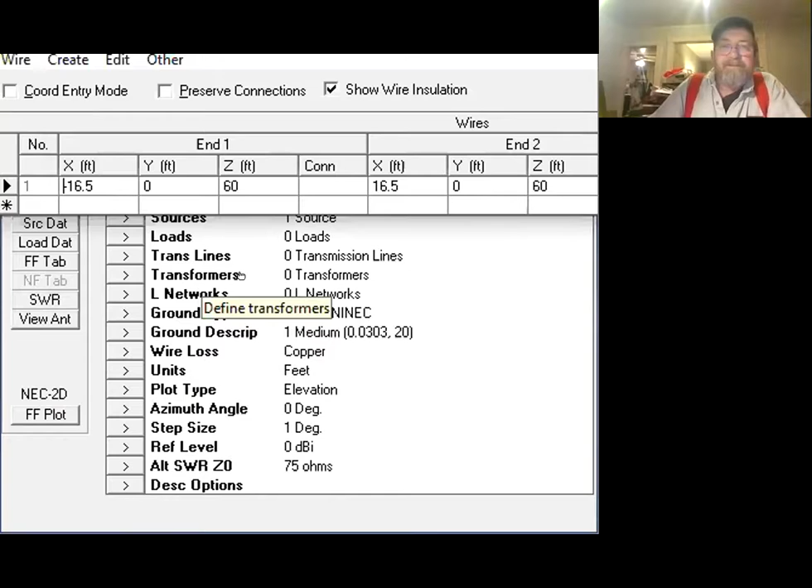You got X, Y, and Z, and each thing is one wire. So this is a wire that goes from, X is side to side, Y is front to back, and Z is height. And again, we set it to feet. So I like to start at the center being 0 and 0. So this wire goes from minus 16 and a half feet, and you can think of that as 16 and a half feet to the left, and it goes to plus 16 and a half feet. You can think of that as 16 and a half feet to the right.

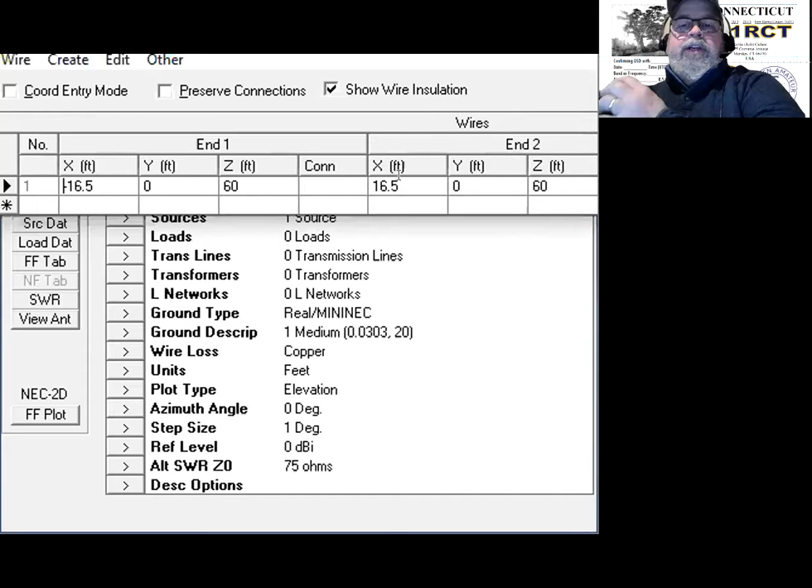Can I interject, John? Yes, go ahead. So if any of you are familiar with the EOC, we've got 3 telephone poles or utility poles. And you could think of minus 16 and plus 16 and 0. The 0 is the middle telephone pole, and minus 16 would be the northern pole, and the plus 16 would be the southern pole, or some sort of representation like that. Yeah, that's okay, because we're going to feed this in the middle.

Okay, and I have it set at 60 feet high. I'm going to use number 14 wire right here. Okay, and I set it for 111 segments. The segments are, up to a point, the more segments you have, the more accurate your antenna model is going to be. It's going to slow down. More segments will slow down calculations.

Back in the bad old days with slow computers, that used to be more of an issue where it would take forever to calculate this antenna with 111 segments maybe, and there was a limit to segments on some of the free software. Dielectric constant, don't worry about that.

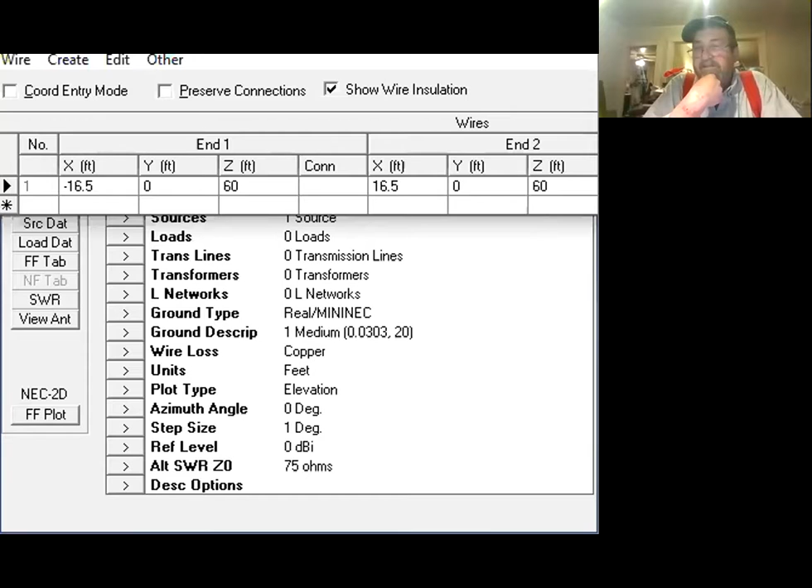What exactly, John, is a segment? Segment is, you're taking that, we've got 33 feet of wire. Okay. And we're chopping it up into 111 segments. Uh-huh. Okay, and what the software is going to do is analyze the antenna currents in each one of those segments sequentially, and then put them together to make the pattern of the radiation. So the more finely segmented it is, the more accurate your pattern is going to be.

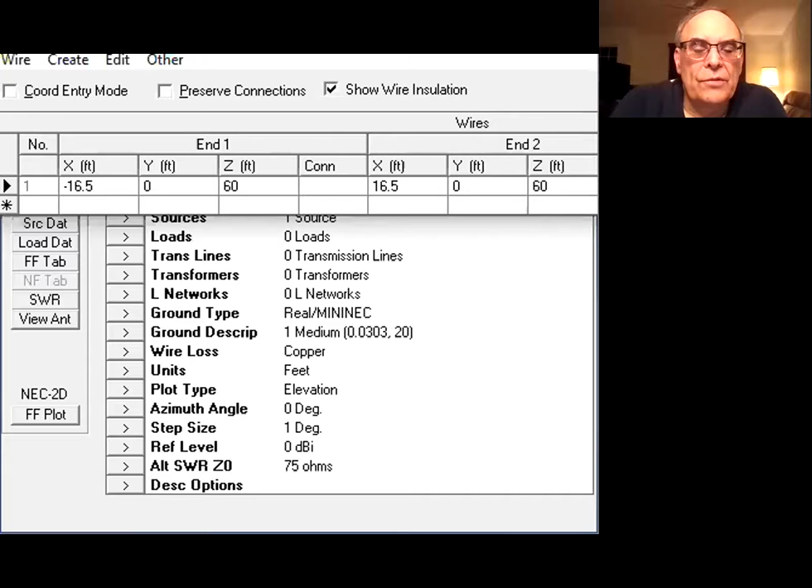Does that make sense? Yeah, I was just wondering, is there some calculation you use to come up with the 111, or is it just a convenient number you picked? You want an odd number, and I'm going to show you why in just a second. John, are you talking about, like, say you're making a dipole with 2 segments?

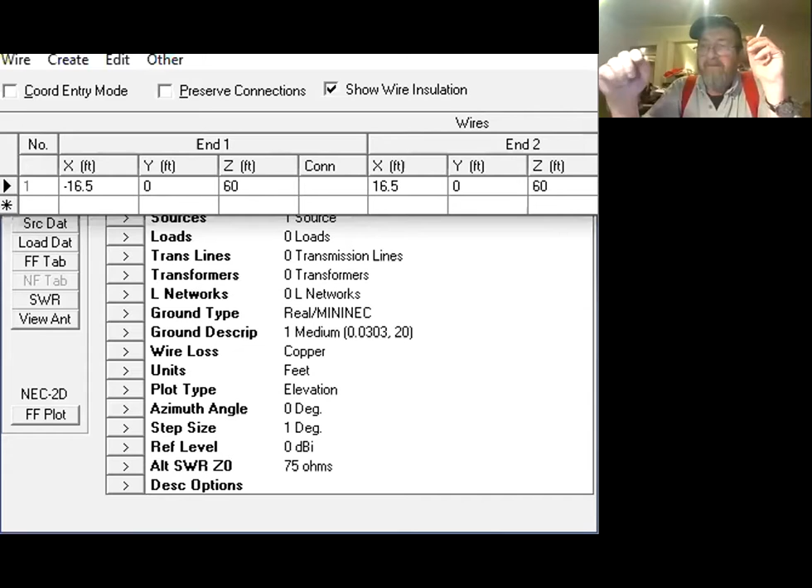Yeah, the wires have to be in straight lines. So if you want to do an inverted V, you need 2 separate wires. Right. Yeah. Okay. The wires have to be in a straight line, each different wire. You can't do a circle.

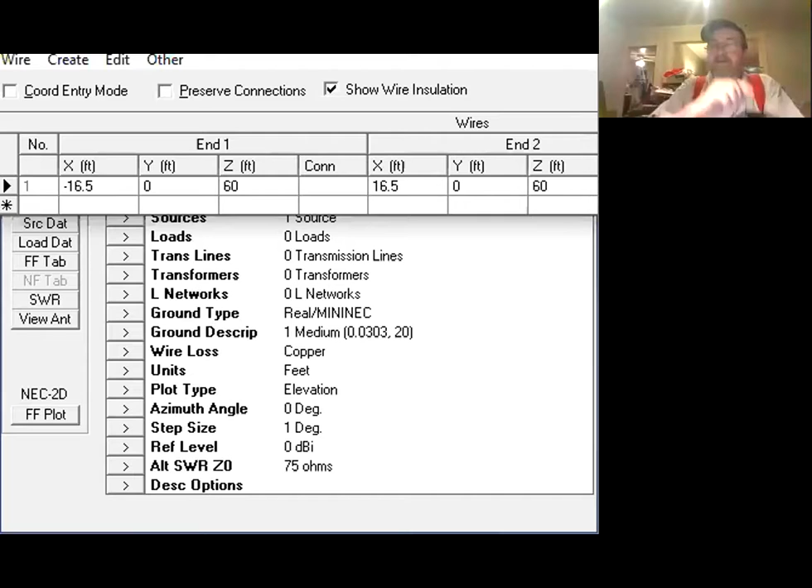To approximate a circular loop, for example, you'd have to do a bunch of segments: start with a triangle, and then a square, and then a pentagon, and then a hexagon, and then an octagon, a nonagon, a decagon, until you are approximating a circle as best you can to do an actual circular antenna. Okay, that doesn't mean circular polarization. That just means circular antenna. So each one of those wires, and you can have many, many wires in a model.

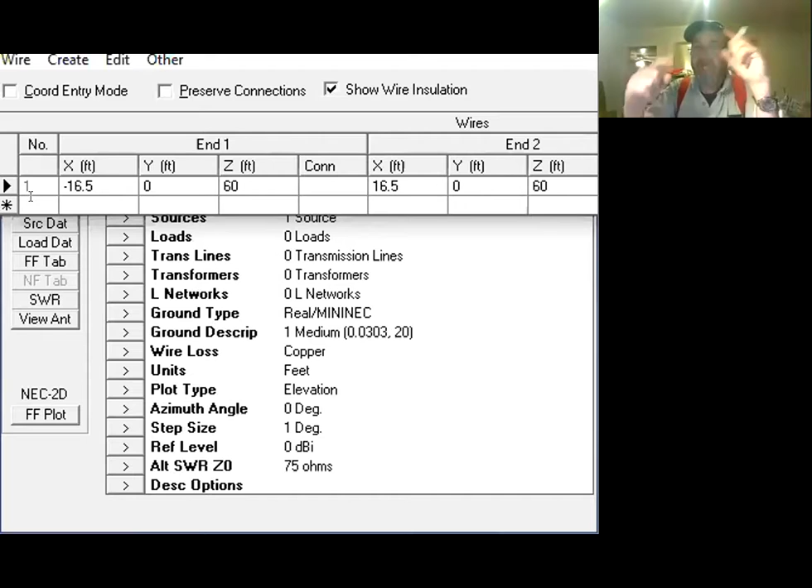Okay, a simple inverted V would have 2 wires, and they would each start at 0. They would go out a certain distance, and a lot of times you've got to start working with our old friends trigonometry and the Pythagorean theorem to figure out where they're going to end up as far as the X and then the Z for the height.

But you can see if you did it right, because there's a way to look at the antenna.

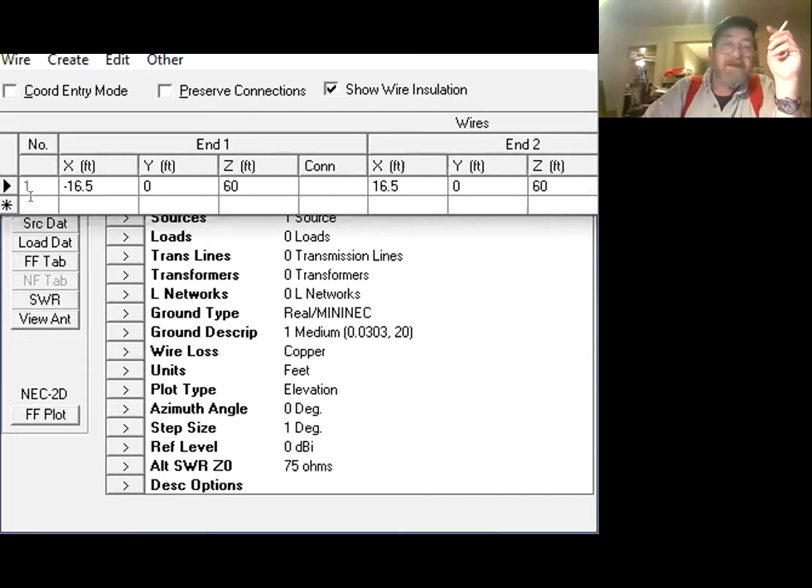So I bet your Algebra 2 trig teacher loved you. I bet he didn't, but he was a great teacher, by the way, one of my favorite teachers. Yeah, I enjoyed his class a lot.

But yeah, it can get into a little bit of math, but it's mostly simple, mostly Pythagorean - A squared plus B squared equals C squared gets you 99% of the answers. So anyway, that's where we're at with that.

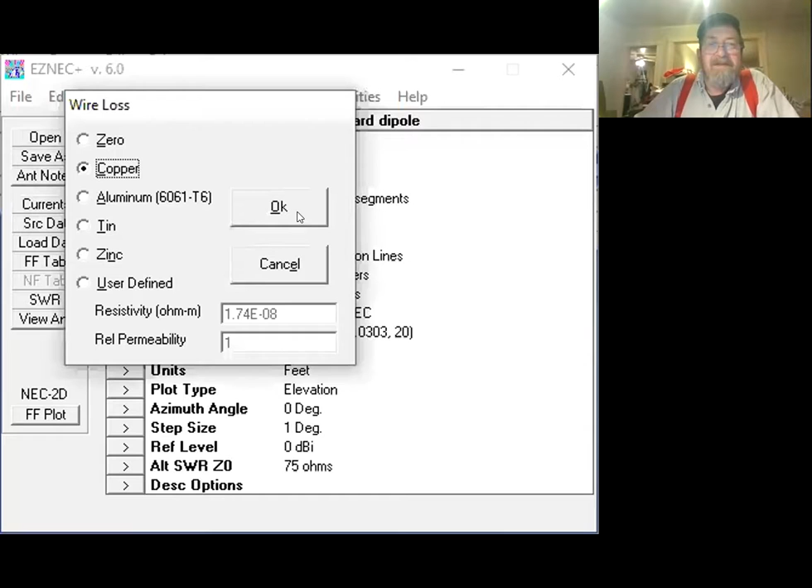Let's see, okay John, so we're back. The way I think of this when you're talking about segments is that in order to describe the antenna, which is not linear, what they're doing is using multiple segments to approximate the curve, because you can do linear regressions and equations for curves, and you basically approximate the curve with multiple short segments of straight lines. That's exactly what it's doing - approximating a curve, and you can play with it. Take it from 111 segments and look at your radiation pattern, take that down to 1 segment and see what the radiation pattern looks like, take it up to 311 and see what it looks like.

It's one of the great things, you can play with this thing all day long. So anyway, we got wires, okay, so we're kind of clear on that.

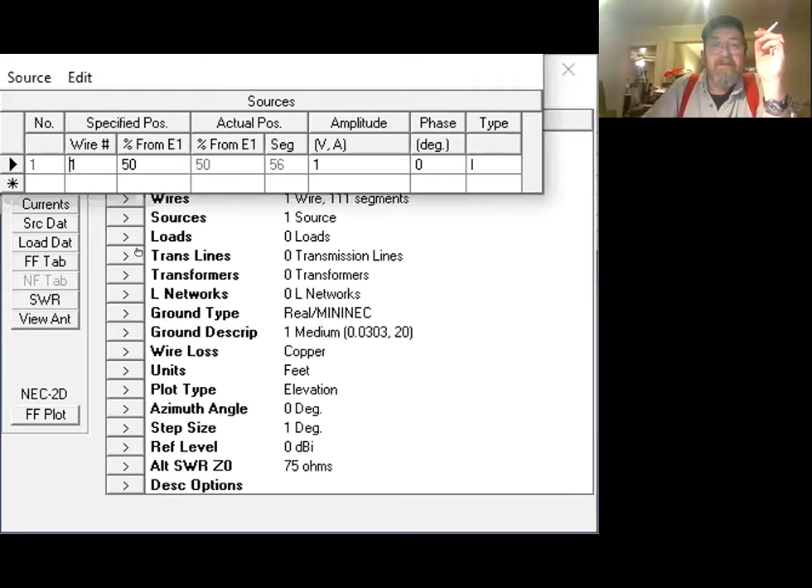And then, whoops, okay, sources - this is where we're going to feed it. Here's why you pick an odd number on a dipole like this: because we're going to be 50% from E1. Each wire has 2 ends, obviously, and this is from E1. We're going to feed it in the middle, so we want to be 50%, and that comes out right in the middle of an odd numbered segment.

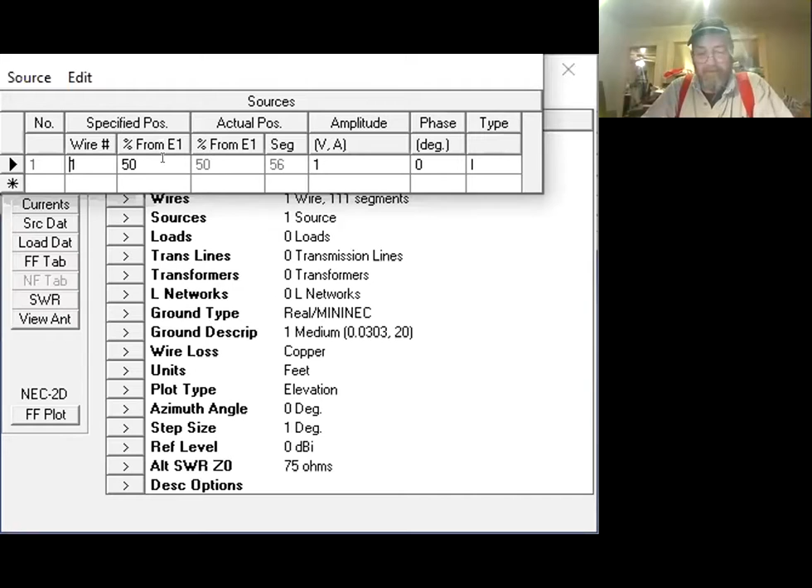So give me one quick second, I'll call you back, okay. Sorry, my favorite son - that was your math teacher. So, yeah.

Okay, so we're going to feed it 50% or halfway, going to feed it in the middle. Okay, that's going to be our source.

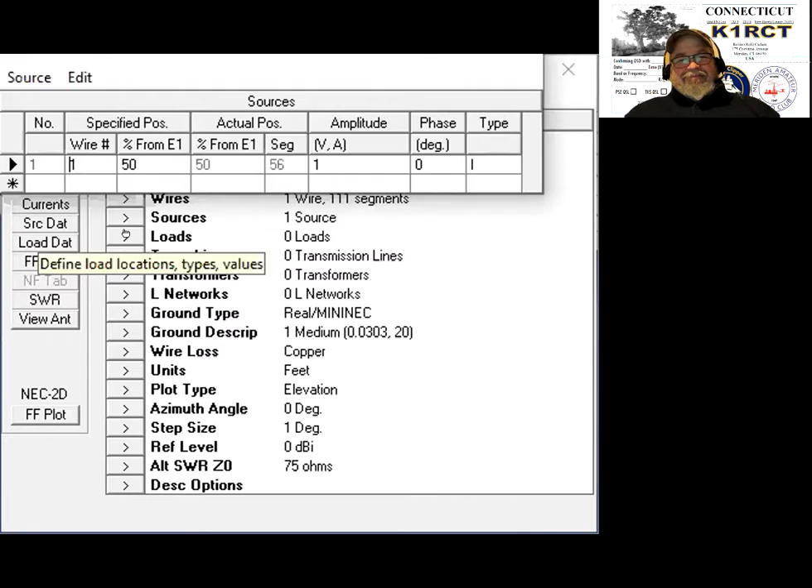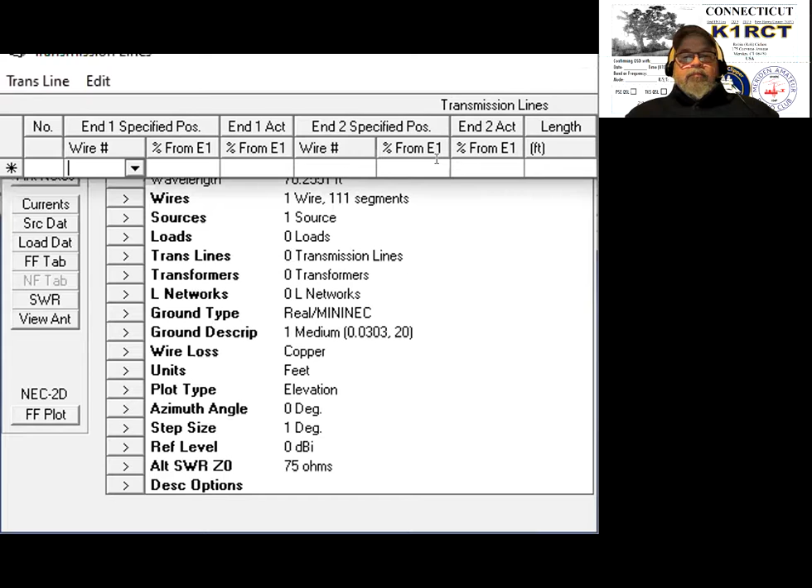Loads - loading coils would be a very good example of a load that you would put in. You can model transmission lines, add transmission lines, whether it's going to be 50 ohm coax or 450 ohm ladder line. You can put in transmission lines if you want, transformers and L networks, and you can really start getting pretty deep into it, but this will give us the basics of what we want.

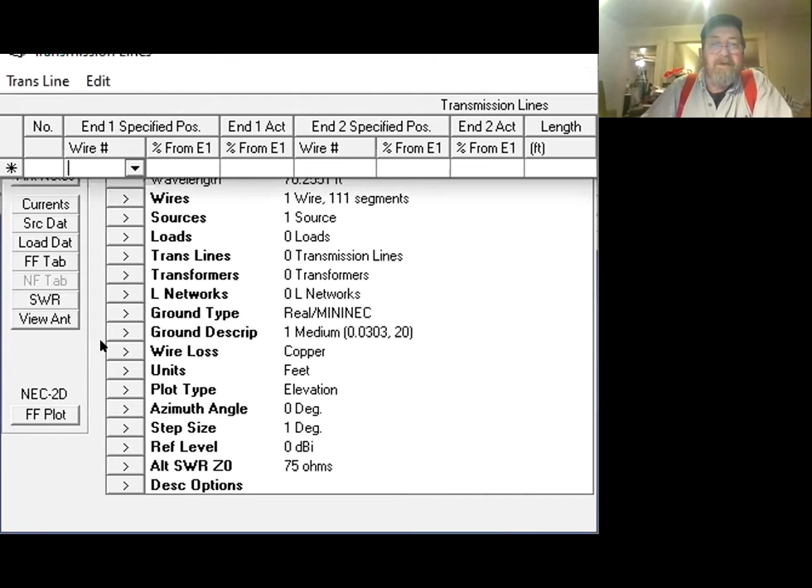Now we're going to go to view antenna here, and everybody can see that. I can't see the entire thing though, it's off the screen, let's see. Maximize if you do - okay yeah, there you go, that's a little better.

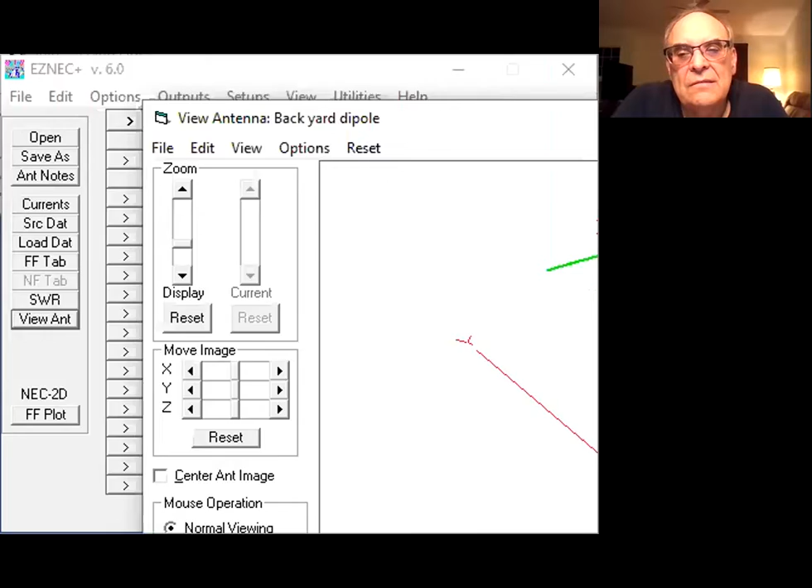Drag it down to the middle of your screen, John. Yeah, it's off to the upper right. No, it's still off to the right. That's a little better, there you go, perfect. Oh, was perfect, yeah, there you go, better?

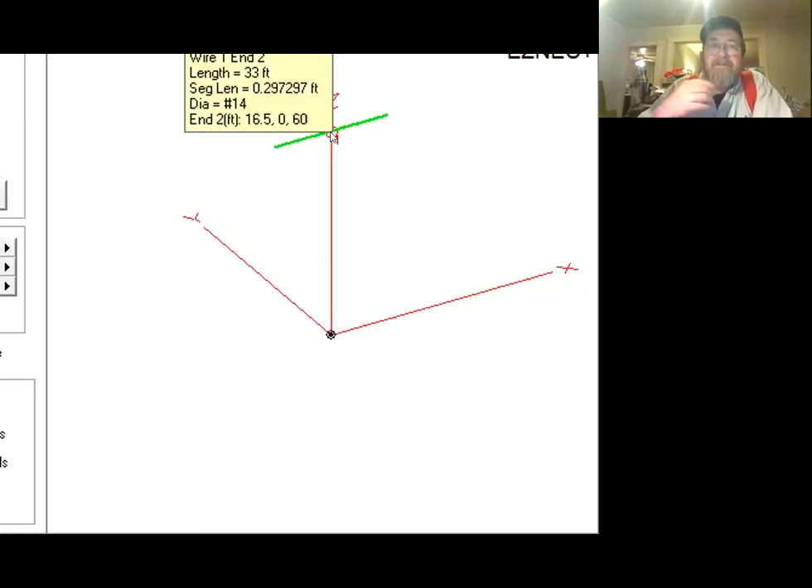Okay, yeah, okay, so here's our Y and our X and our Z, and there's our antenna. You can see right in the middle there is the circle, and that's the feed. You can see that I put the cursor right over it - you see that little pop-up box? It says the wire is 33 feet long.

33 feet long. The segment length is length divided by number of segments, 14 gauge wire, and end one is minus 16 and a half feet.

Move your cursor, there you go, there we go, and that's plus - yeah, it's plus 16 and a half feet. So that's what the antenna looks like, and that's just a good check too - is this what I meant to design? Okay.

So let's get rid of that, and then we'll take a look at the SWR. We specified again the frequency at 14 megahertz.

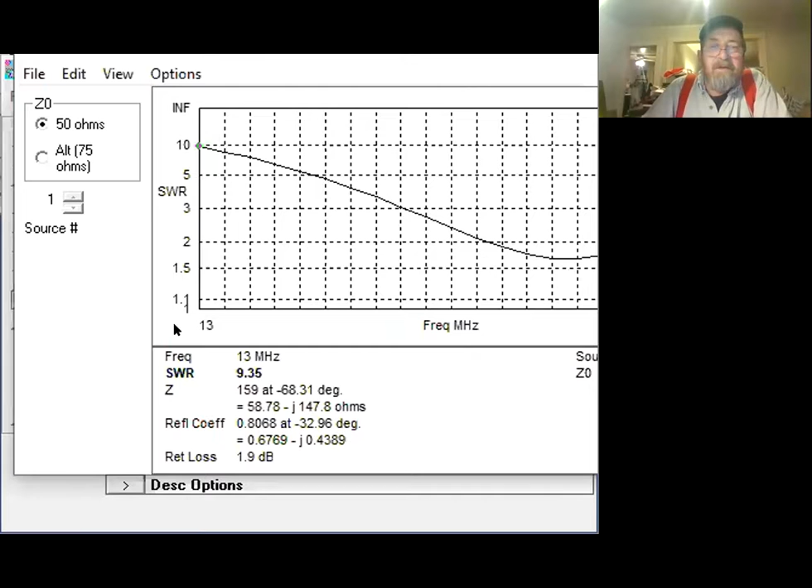1.1, 1.5 up to 10, and so right there is your low point, about 1.6 or so. 1.6, and that's right about what you would expect for, what do we say, the height was about 60 feet. That's right about almost exactly what you would expect for a 20-meter dipole at 60 feet.

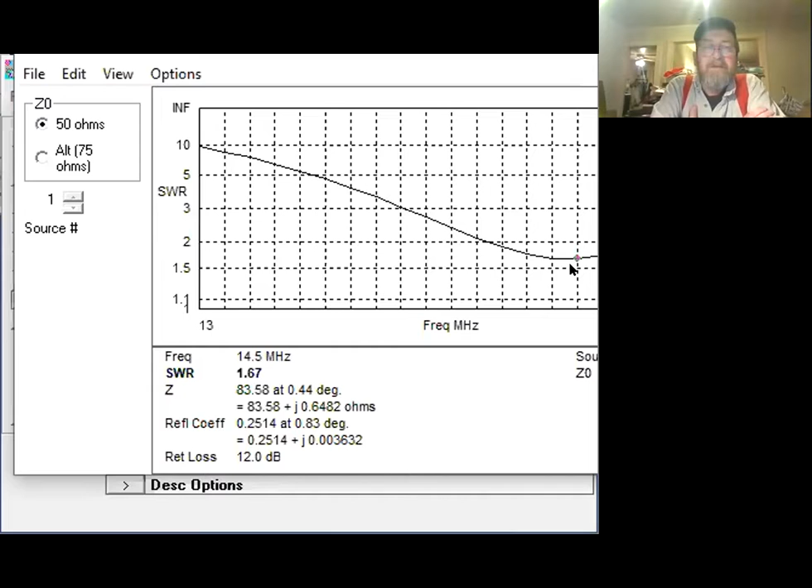What's your distance from ground? Yeah, what's the height above ground? I think he said 60 feet, didn't he? He said it, but I'm not sure if that's where it's set. I would check that, let's see.

Ah, crap. What do we do? Did I close the program? What an idiot, you closed the program, didn't you? Oh, what an idiot, your teacher's going to call you. At the very least, you stop here. All right, we'll start it up again.

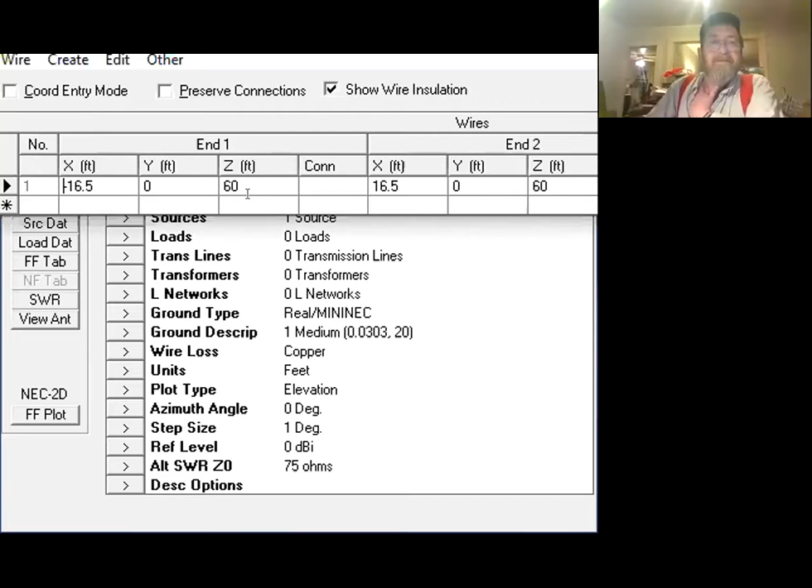No, I've had... so when I see the radiation going straight up, it's like the wires on the ground, like an NVIS. That's exactly what I thought. It looks like an NVIS, right? Yeah, here we go, 60 feet. Yep. Okay, he got a 60 foot.

Why would it look like that? I don't know, I'm just winging this, so I didn't really have it prepared.

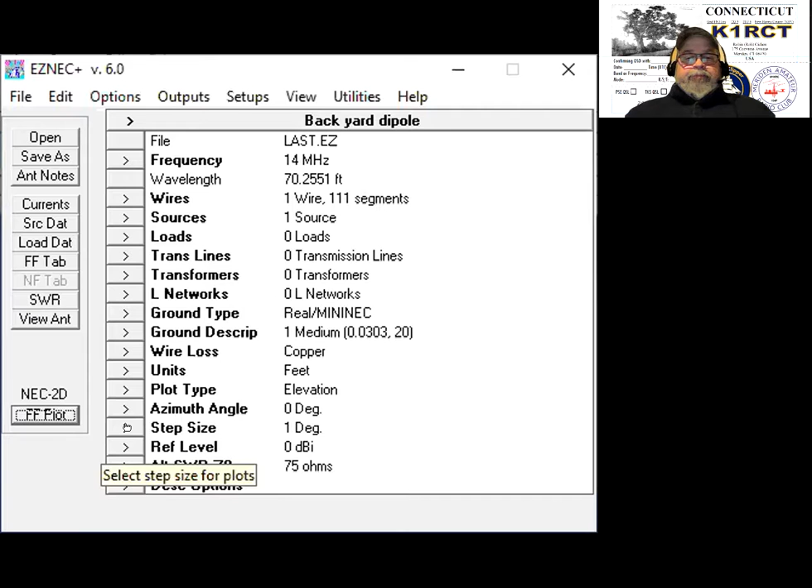Let's see, azimuth angle is 0. Oh, never mind, go back to... step size is 1 degree. Switch, change to azimuth. Okay.

But here's your, at 5 degrees, this is what you're in. One might say that an antenna that you just modeled, John, would be good for American, local, regional type transmission, right? I mean, literally, if you've got that type of azimuth or elevation angle, you're probably going to drop down. Your first hop's going to be somewhere in the U.S., maybe even your second hop.

Yeah, there's something I'm missing here, because that's not... that just doesn't pass the smell test for how a dipole, it's a half-wave dipole, works. That's not how a half-wave dipole should behave. I mean, we can try, well, let's see. Yeah, even 20 feet off, 10 feet off the ground is going to give you some normal propagation. Right, it's going to give you takeoff. We're going to cut that.

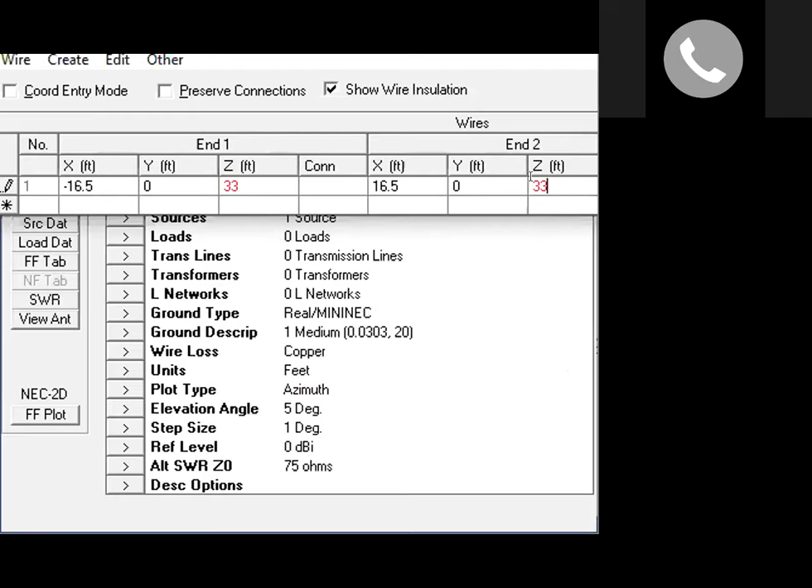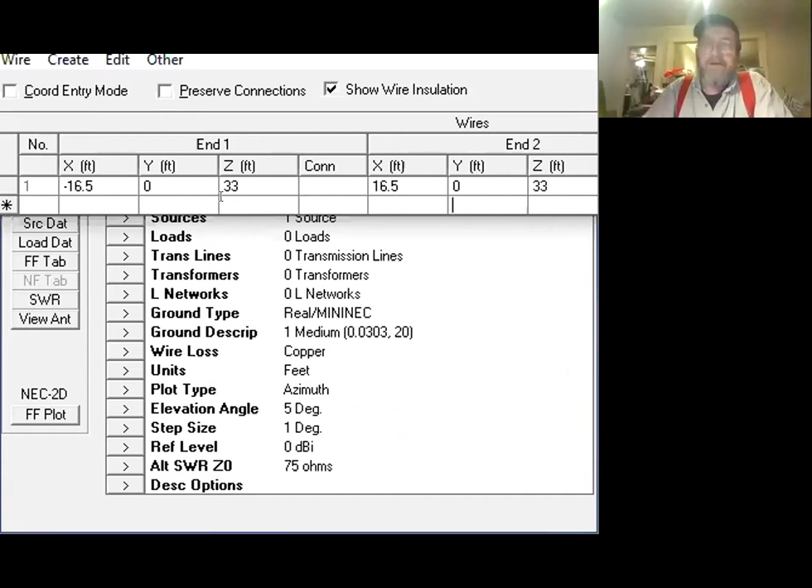To 33 feet, okay. Actually there are ways, if you have a lot of wires, there's a way to bring everything up and down by a certain amount altogether. You don't have to go into each wire, but it was just as easy to do that. If you're going to model a sloper or whatever, you can change those values.

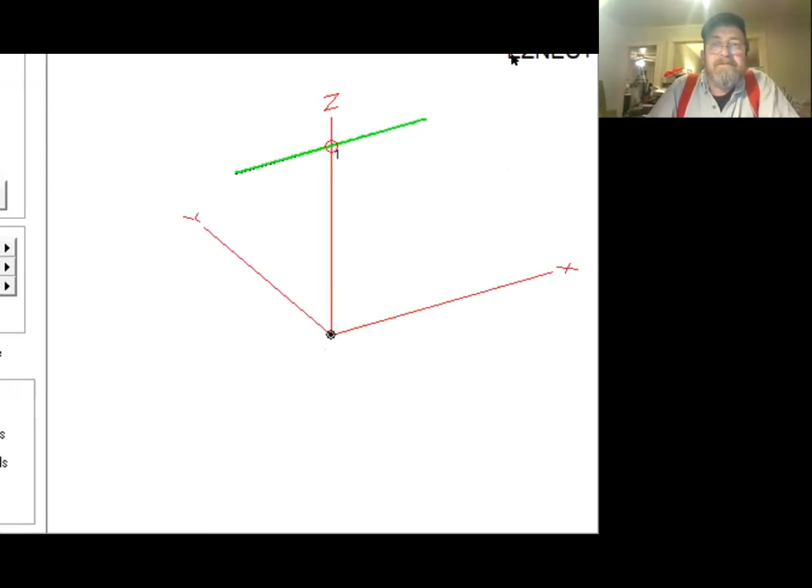Okay, so let's see. Antenna, okay, so the height now is about a half wave high. Okay, and we're going to... okay, and that's, see, I mean, that looks about the same.

Okay, and let's see, now we're gonna do elevation.

How's your arm, Eric? That's the one you were trying to find, isn't it? Yeah, it was fine until last night. This morning I woke up and put my arm up and it's like, it's not debilitating, but it's like somebody gave me a good punch in the arm. That's what it feels like. But otherwise, I get allergy shots every few weeks, so I'm used to sore arms anyway. I've been doing that since I was a kid. Well, I'm a diabetic, so I take shots every day, sometimes two or three times a day. Needles are old hat, right? They're old hat, but they don't make me sore afterwards. Sorry, okay, John, we hijacked your conversation.

No problem. Okay, this is the picture you're looking for. That's the one, buddy. Yeah, okay, so here's...

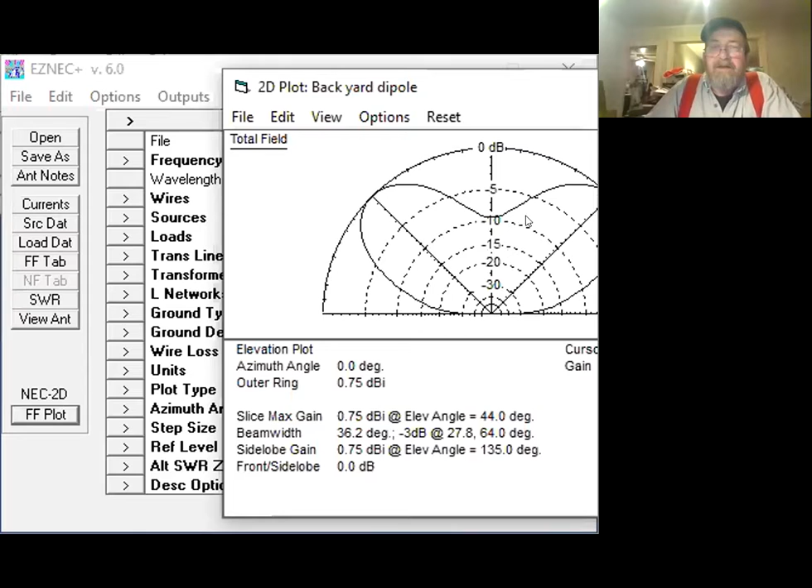So here we drop the height and you can see now it's starting to radiate better. And you can, if you watch the numbers, you see how they're changing with the elevation. So it'll default up to the max, that's what those lines are, and it'll bring them around to whatever elevation that you want.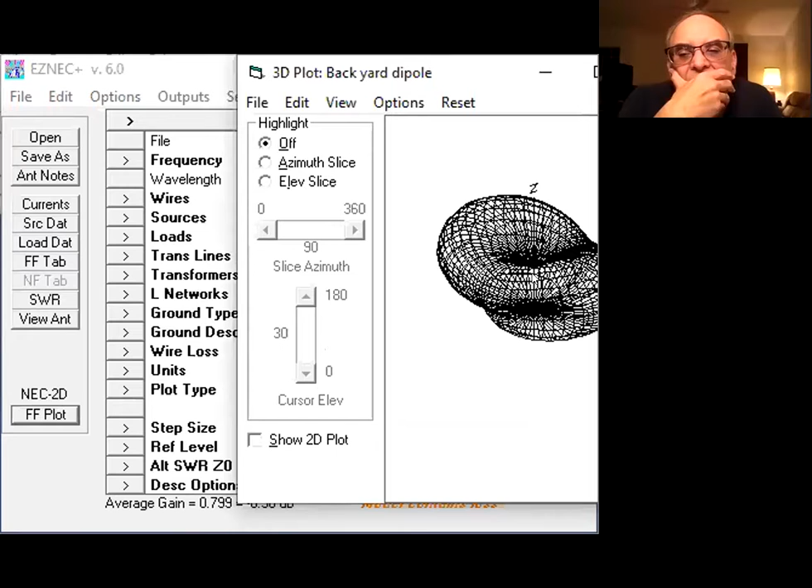Yeah, that's the 3D elevation and azimuth combined, and then you can slice it like that. Can you slide that a little to your left? Like grab it, yeah, right there, just grab it and move it. There you go.

Too big, is that too big? Go back one. Yeah, there, that's perfect. Dude, yeah, like that, fine.

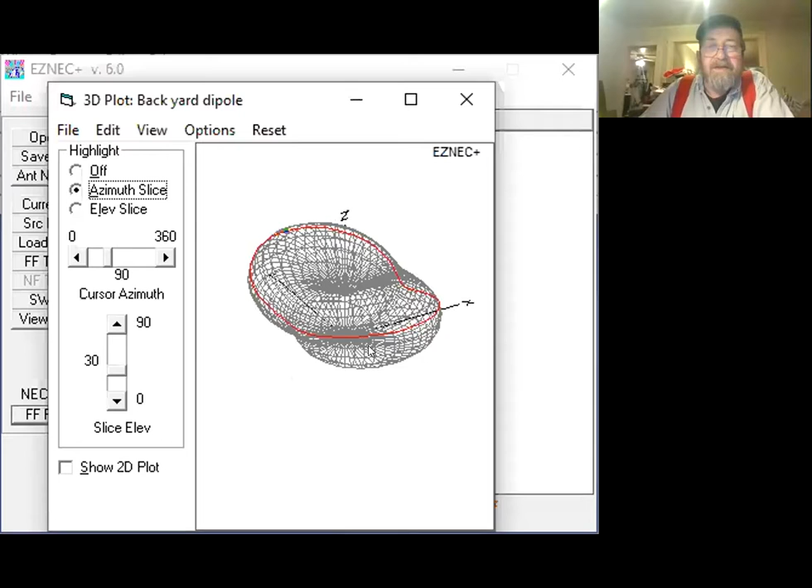Okay, so there's the red line there is your azimuth slice, and here's your azimuth, and here's your elevation slice. It's just a different way of looking at it. That paints a complete picture for my mind. I understand that, yeah, that's pretty cool.

Again, that gets you back to like that. If you show 2D plot, and you can slide them, I mean, you can play with this thing a million different ways, but so that's the very basics of how to build an antenna model.

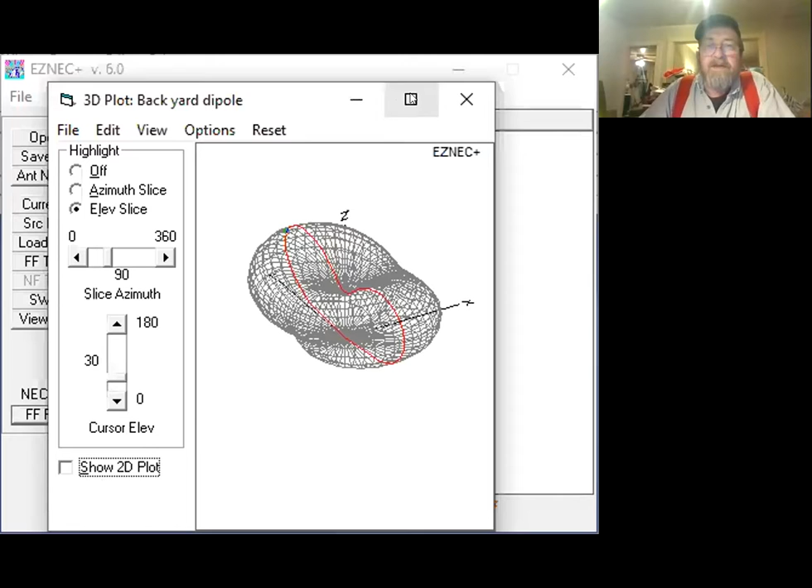One quick check, kind of a quick sanity check, is to, let's see, where do you check it for? Okay, model contains loss, down there, everybody see that at the bottom? Yeah, okay, and average gain is 0.799. Average gain on an antenna should be approximately 1. 0.799 is terrible as far as the model containing loss. Model contains loss doesn't mean necessarily the antenna contains loss, it means the model does.

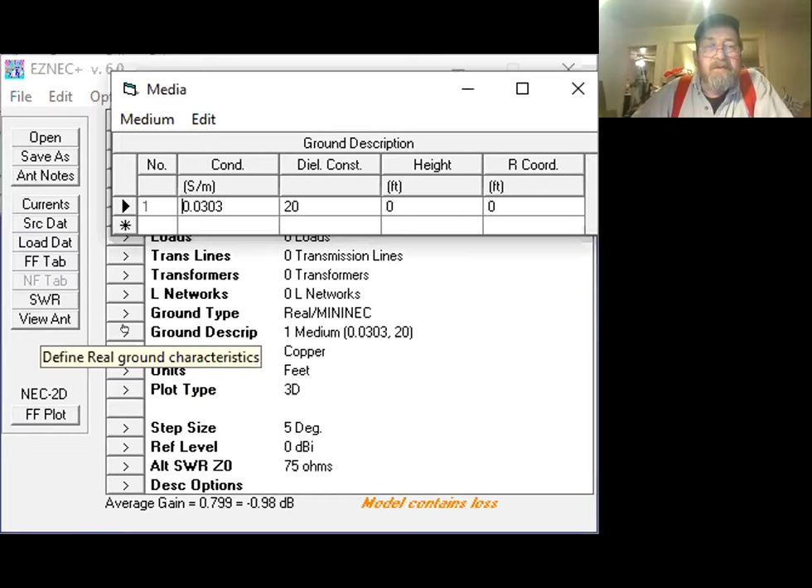And when you change ground description, ground type to free space, change your wire loss to 0. I think that's the 2.

Okay, so you can't erect an antenna in free space. You can't find zero loss wire, but I bet you can make it in free space if you were on Mars. Well, okay, well then you'd still be on Mars, right? Now, somewhere in between, maybe. Okay, yeah, somewhere in between. So there's a basic sanity check.

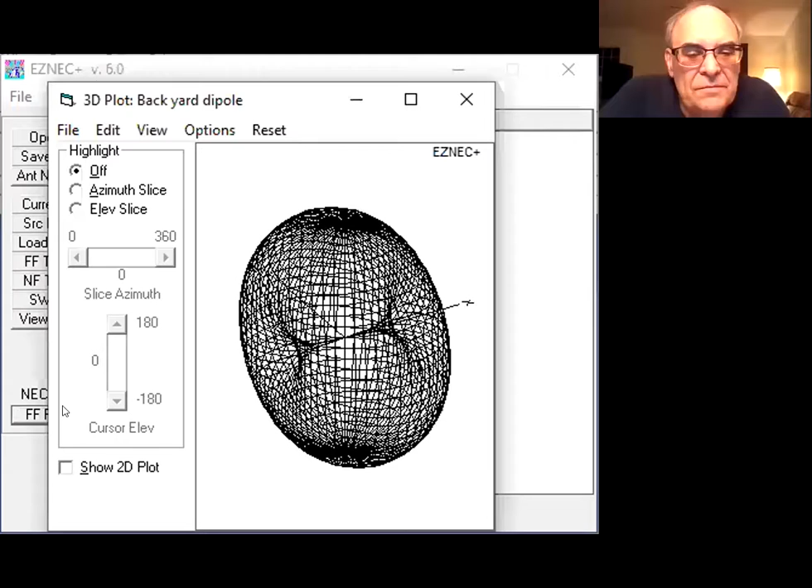Now the average gain is 1, which is exactly what it should be and what you would expect. Okay, so you could say isotropic here, John. Yeah, well, no, it's still going to have a radiation pattern. Still got that radiation, but your average, because you got peaks here and you got peaks here, but you got nulls here and you got nulls here. And when you average them all out, it sort of proves the theory that antennas cannot create power.

And you can push it around, which is what antennas do. You can push the power around, but you cannot create power. So, which you mean to say amplify? Is that what you? Is that the? Antennas, if you amplify it in one place, it de-amplifies it in another place. Right. I like to think of antenna radiation patterns as a water balloon. You can squeeze them any which way you want, but you don't get any more. Right. Yeah. That's a good way to look at it. That's a good analogy. That's right. Yeah.

Another way that I've always thought about it is you got a flashlight bulb. And that's more or less your isotropic antenna. And it's going to radiate all around in every direction. And if you had a magic flashlight bulb, it would even radiate straight down. And it's not very bright in any direction, but it does light up the whole room. When you put a reflector behind it, like in a typical flashlight, all of a sudden that side of the room gets very bright and that side of the room gets very dark. And that's your front to back

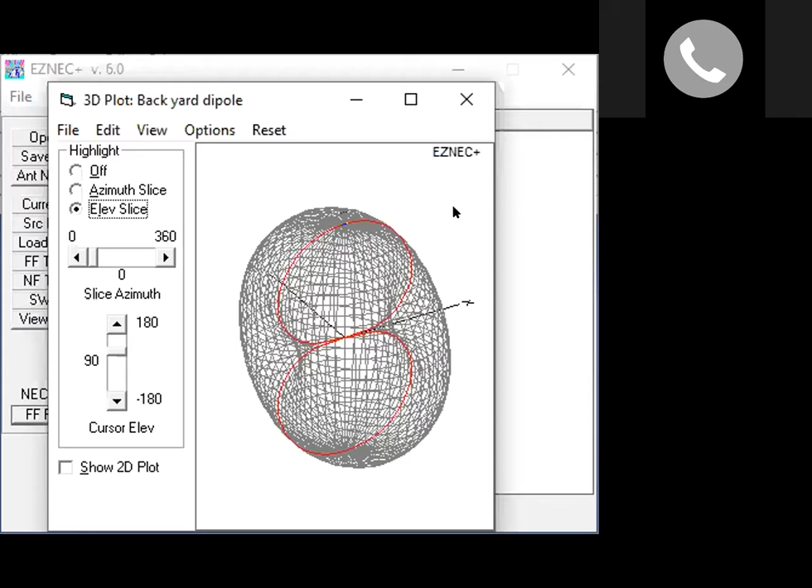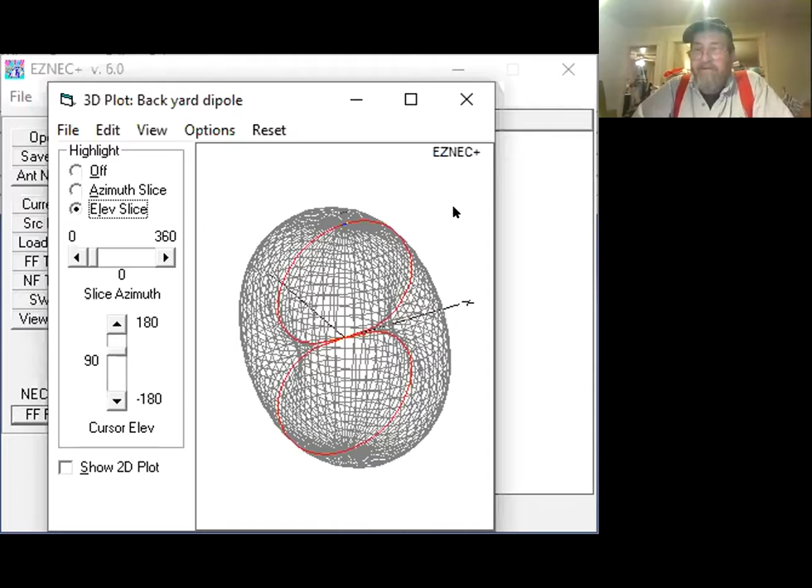Yeah. But one thing to keep in mind with antennas is, it's one thing to say, wow, 3 dB gain is double your power or half your power. Wow. As a widely violated rule of thumb, one S unit is 6 dB. So 3 dB is half of an S unit. And how often will half of an S unit make a difference between making that contact and not? So heroic efforts for 3 dB gain are often not worth it.

John, on your original dipole there, what if we feed that Z0, change it from 50 to 75 ohms? What's that do to the SWR? My guess is it's going to make it just about perfect, Jim, but let's, okay. There's a dipole. Well, I know the military, they use a lot of RG11 transmission line feeding dipoles, which is 75 ohm.

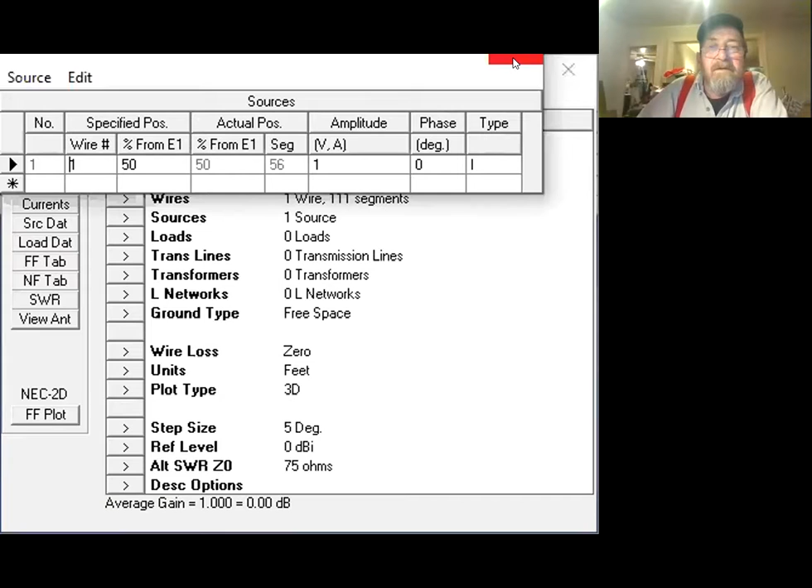If you run that report, is that where it was after you ran it? The SWR report? Let's see. Well, we could try that. There we go. There it is. Okay. You're better at this than I am. Yeah, see that? Good point, Jim. You see how it made it just about 1-to-1, 1.055 there. Because the theoretical half-wave dipole is 73. I think it's 72 ohms is half-wave dipole in free space.

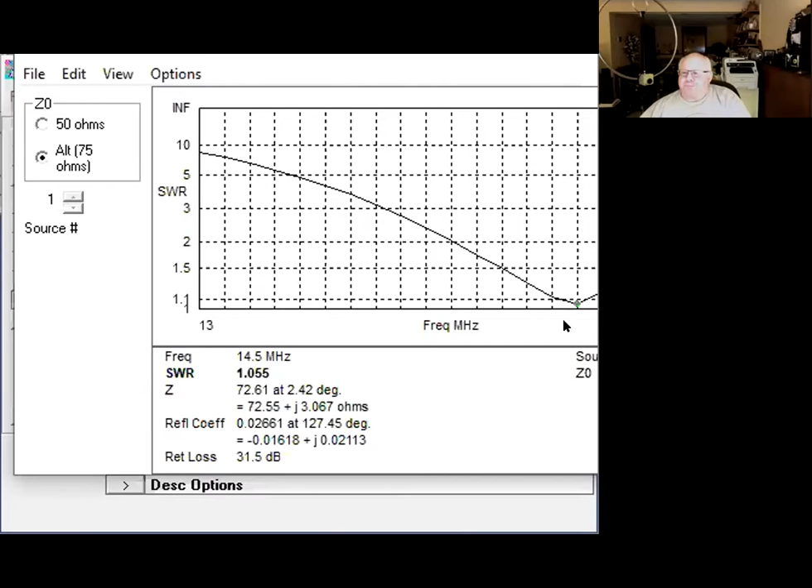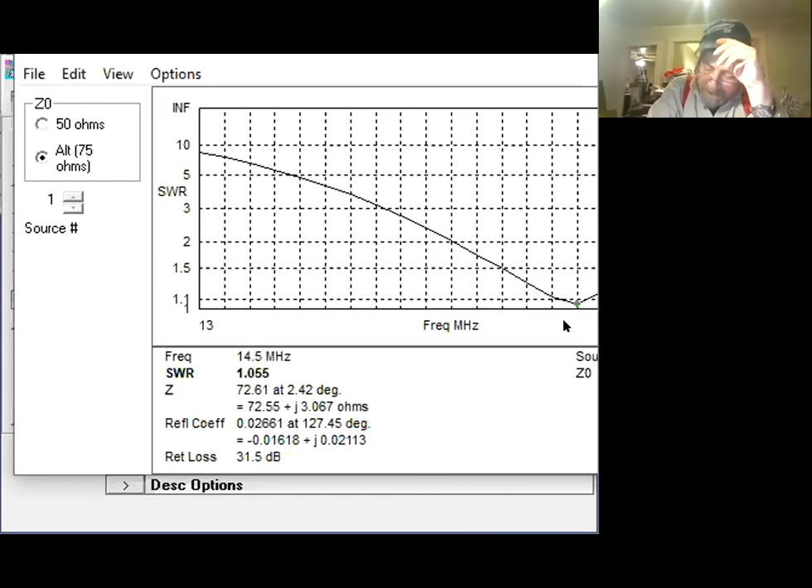You don't see too many hams using the 75 ohm feed lines. It's hard to get good quality 75 ohm feed line. You can get a lot of junky stuff, but it's hard to get good RG11 quality. RG11 is, yeah, it's not common. Right. There's any number of different things that I could tell you about, but trying to explain to people why it doesn't matter, or it can be better to use 75 ohm instead of 50 ohm, half the time you're just pissing in the wind. No, it says it's got to be 50 ohm. It's got to be 50 ohm.

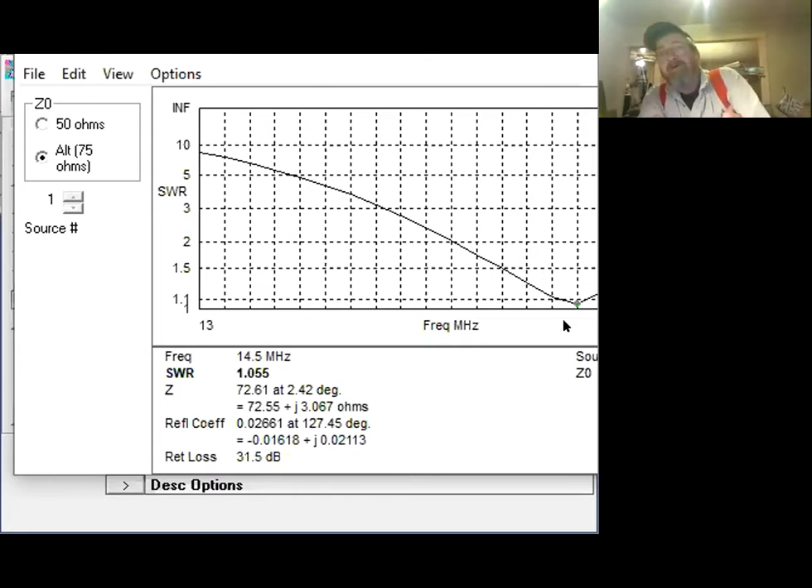And there's, well, the reality is an antenna's impedance is not fixed. You're only going to have a perfect match on one frequency. As we move up and down the band, the impedance of the antenna changes anyway. So trying to lock into the idyllic theoretical impedance with the feed line is not productive.

Most people don't understand the concept, though. That's the problem. We're trying to relate the unknown to the known here. Yeah. And most people don't realize that. They think, well, it says 50 ohm, I got to live with 50 ohm. The reality is much different.

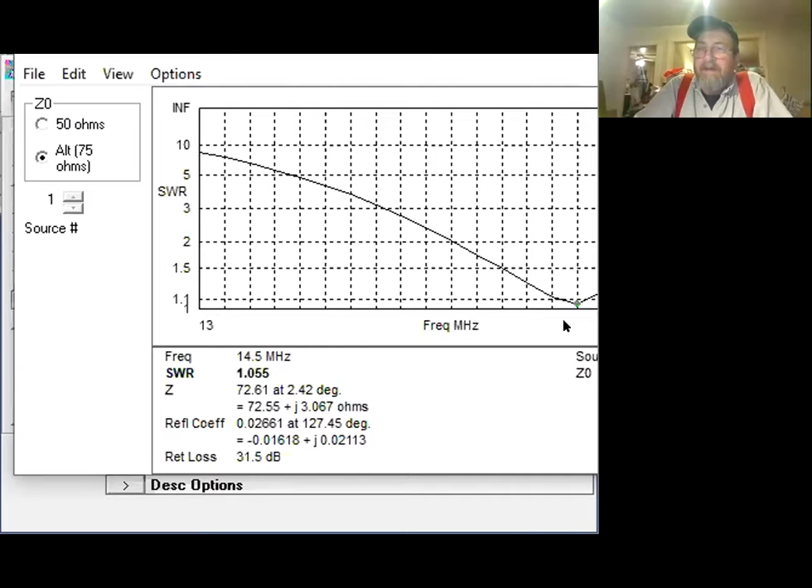Yeah. Well, I suspect the majority, certainly many hams, don't understand that a low SWR does not mean that you have a good antenna. No, that's true. And a high SWR does not mean that you have a bad antenna. I would 100% agree with that.

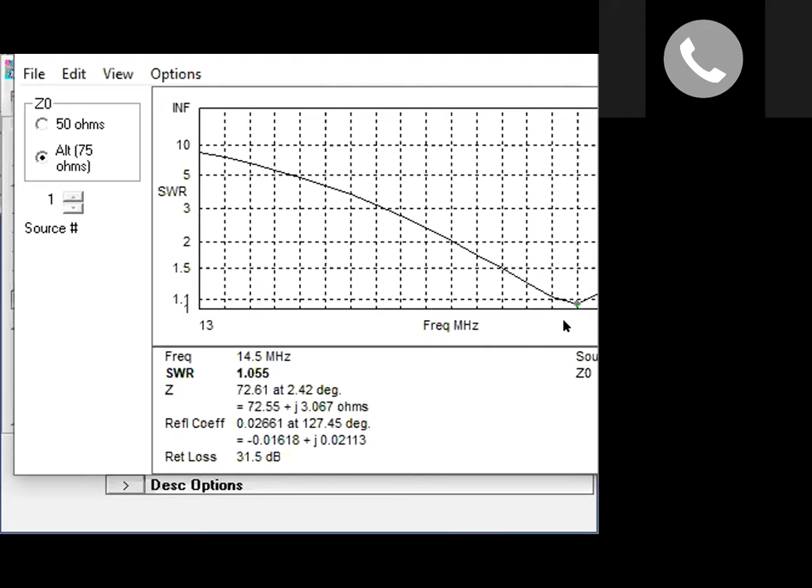And look at the G5RV that we have when it's operational. That thing loads out, and I don't mean resonates, but it loads out on 160 if I put enough power into it. Yeah, you're just heating the air at that point. I'm heating transistors and resistors and whatnot in the tuner, and the coax. Well, killing a few birds in the process.

Okay, we can stop the share. I think that's why you want to tune the antenna, not match it, or tune it over matching it, if you will.

Well, my favorite example is to build a 40-meter dipole and make it a perfect 40-meter dipole. SWR 1-to-1, yada, yada, yada, feed it with RG8X. 50, 100 feet of RG8X. Your losses aren't too much. You know, works great.

Now I put a tuner in the shack and switch to 20 meters with that same antenna. 100 feet of RG8X, you switch to 20 meters, and your tuner sees about a 6-to-1 SWR. 100 watts goes out, tuner matches the 6-to-1. How much radiates as RF, do you suppose? How many feet of coax in your example? 100 feet. Okay.